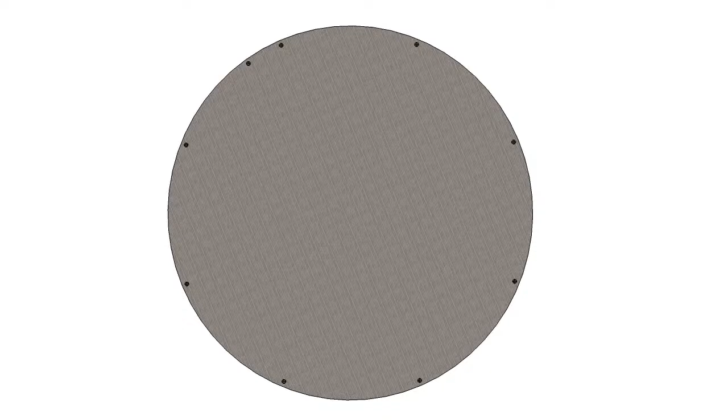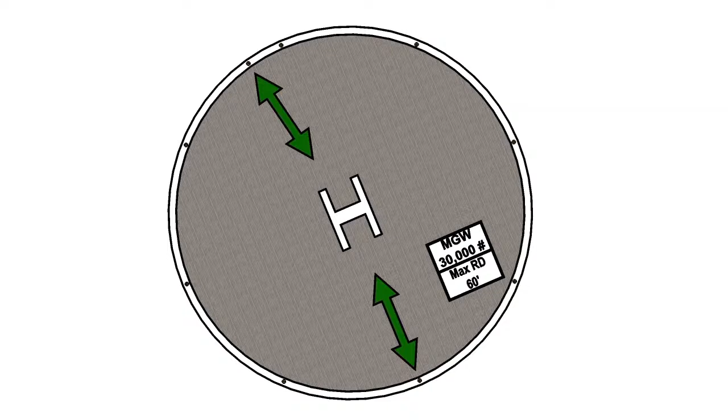So you have the TLOF, the touchdown and liftoff area, the lighting perimeter lights around that. And then with that, we put in a 12-inch white perimeter to mark the TLOF. Then the H goes in the middle. That's lined with the predominant approach departure path. You have the information box with the max gross weight and the max rotor diameter. Directional arrows for approach departure paths.

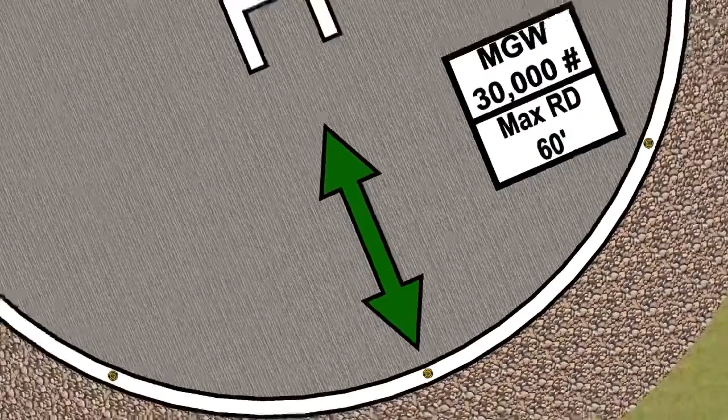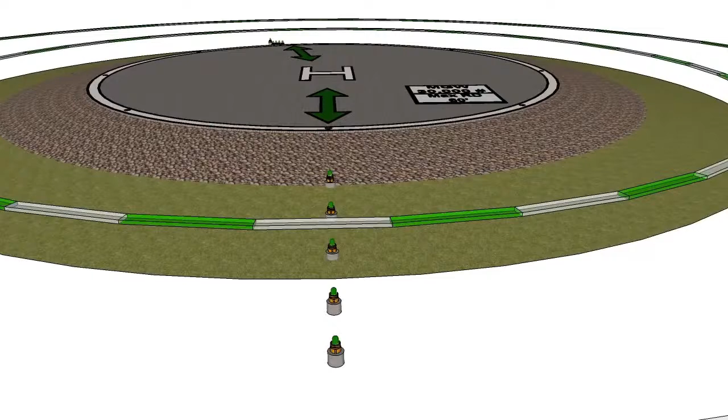And the H is a specific size. The information box as well, so the pilot knows how big of an aircraft it will take. Generally put it, and this is a ground-based heliport, on a slight berm, makes for much better water runoff. And then those other areas of the FATO and the TLOF are in white and green. Approach departure lighting. You see the approach departure path, which is green for the 8-to-1, blue for the 2-to-1s.

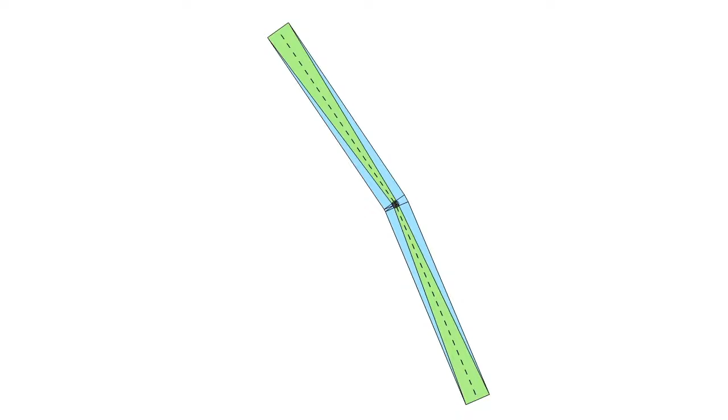This is a surface that's protected by the FAA's Part 157 and 77. And there you see 2 approach departure paths into and out of the heliport. Now remember that the approach departure path is what we protect. So the helicopter is not going to generally fly that because it's only 7.125 degrees. Most helicopter pilots are flying about 10, 12, 15 degrees into any heliport, but that's what we protect to. So that's a real quick and dirty.

You have the TLOF, the FATO, the safety area, the 2-to-1s, the 8-to-1s, and the approach departure paths, and then all the different markings and lighting that goes into it, and that's a heliport. Okay, I'm going to ask you, because I don't know what this is, a 2-to-1 and an 8-to-1. What do you mean by that?

All right, so an 8-to-1, when you look at the protected surface that's spelled out in the Code of Federal Regulations, they talk about the approach surface. So for every 8 feet that you extend horizontally from the edge of the FATO at FATO height, the FATO being the final approach and takeoff area, you then come up 1 foot. So at 80 feet, now you're at 10 feet. At 800 feet, you're at 100 feet.

What that means is that is the floor that you want to maintain non-obstructing surfaces. You don't want anything to penetrate that floor. It's like a ramp into the sky. So the 8-to-1 is for the surface that we're trying to protect. The 2-to-1 on the outside of the 8-to-1 you saw in blue, that's the surface on the perimeter, which is a transitional surface. That's the area that we want to protect.

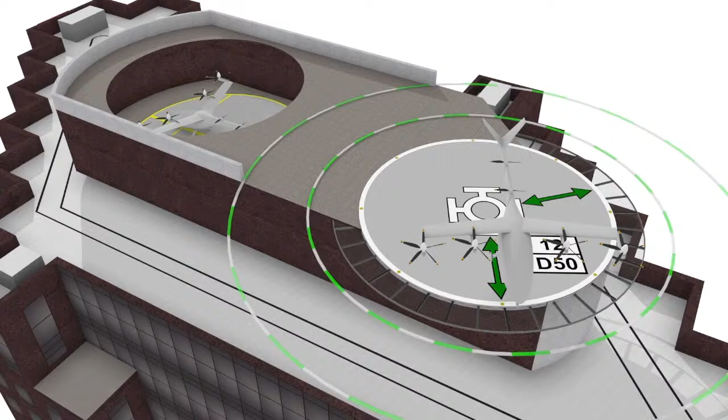So you'd have the landing platform, and then you'd have an area where you could go to park, and then the aircraft would go below deck and then park underneath. Whether that will be built or not, who knows? But this was my design and artist rendition that I created for that.

That's super cool. We got another one here. Now, this is on a parking deck. We looked at having 2 different landing areas with 3 parking areas and a terminal. We were looking at doing a renovation of an existing parking deck. Definitely doable. We just had to go through and look at the construction of the parking deck and make sure that the structural engineer could verify we had the excess strength in the building to support this.

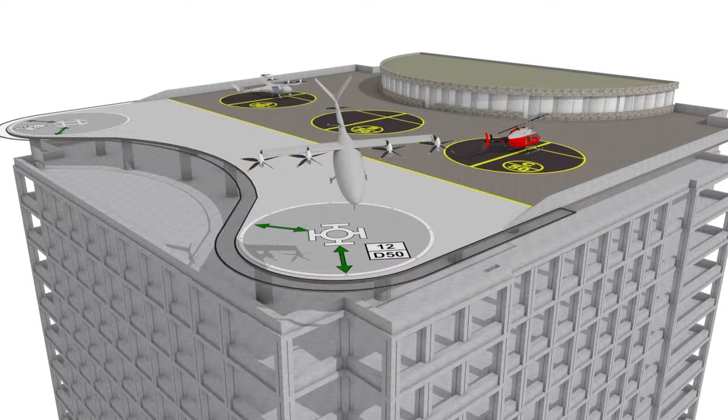I think the biggest key when you get into elevated structures of any kind is, one, if it's an occupied structure, but if it's elevated, there's a higher bar that you have to clear for safety when it comes to building and fire code, whereas ground is less restrictive just because it has less hazards associated with it.

Wow. Okay. Very cool. Now, as a practical matter, are any of these actually being built today? Because when you read the news, you hear all this chatter about, oh, look, Lilium's building stuff in Florida. They're going to be flying by next year is what they originally said. So are there any of these things out there right now, at least in the US?

I would say no. And the challenge is, just because an engineering brief was published, we haven't set the system up yet for running that through the FAA for permitting or for airspace determination. So we have to create the forms for vertiports. We have to create the data capture for the terminology for vertiports. We really probably ought to have a regulation in place that actually says the term vertiport somewhere. Yeah. And vertipad, vertideck, vertistop.